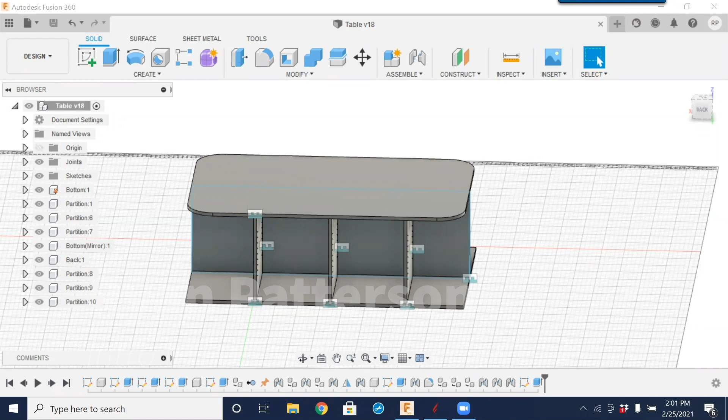Good. Today we have, I think, all the hard work done. All the challenges of constraining everything and getting the model put together. It's all done. And last week we went through and looked at how to use Fusion to create the tool pathing. If you remember, and I'm going to assume that I saved, so we could go into this manufacturing tab, and of course I did not. So we don't have any of the manufacturing here, but this is where, from last week, we spent most of the time in the manufacturing window.

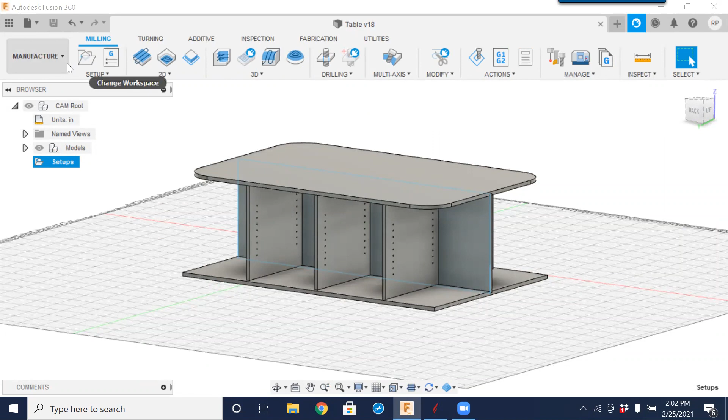Today, in our design space, in our workspace, we're going to be working with drawings and taking those drawings out to VCarve Pro. And we're also going to look at using a gadget within VCarve Pro to help with the import of the items. So we're going to kind of see how it goes. I've not used the DXF import gadget from Vectric for a while, so I might have some relearning to do myself.

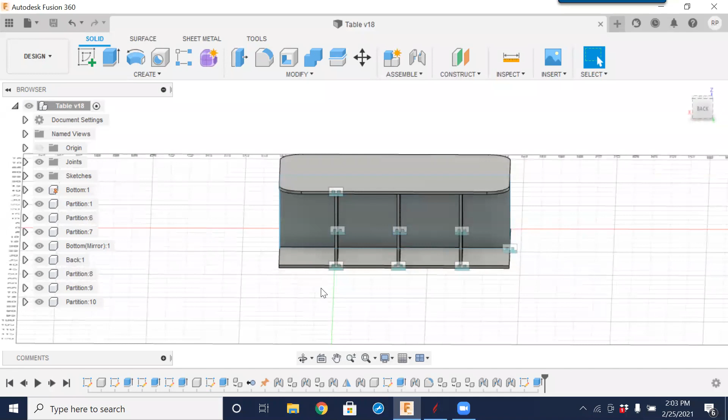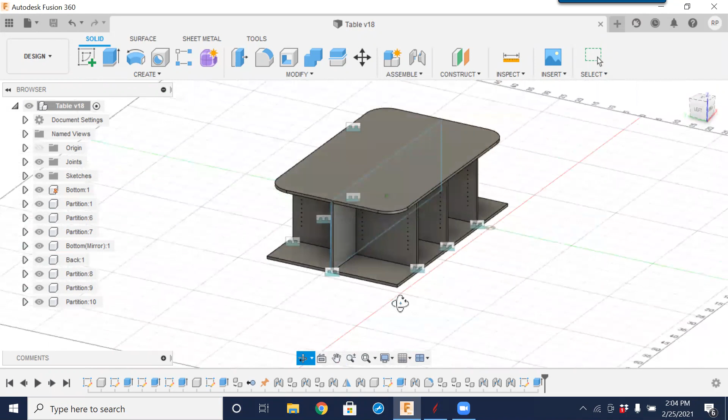And since the last time we spoke, I did add some holes for adjustable shelving. And all 6 partitions are duplicate partitions or cloned partitions. So if we change the size of one or change the hole location in one, they change across the board. Just to view what we've done and how this is all parametric and is done through the user parameters. So we've set up a couple variables, and I'm going to hope that they all just work. I've not actually fully tested this out.

So if you remember from day one, we came in and set up a couple user variables in here: material thickness, the width in the X, the length in the Y, and the height. Then we have a bin 1 and bin 2, which I don't know if I implemented those. So we're going to explore those to see if everything is actually implemented and working correctly.

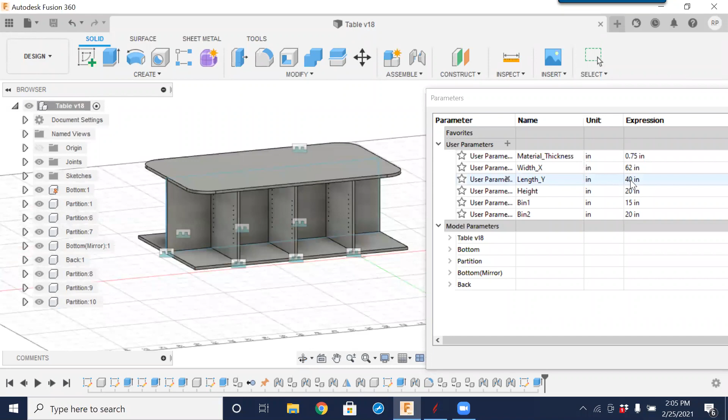So the idea behind this, now that we have this model completely finished, if we've cut this and we realize the customer, whoever it is, doesn't want it to be 40 inches deep, that they want it to be just 30 inches deep. So I'm going to enter in 30 and then OK. And we could see that that entire model has just been reduced in width, and all parts have been sized accordingly. So that is what parametric modeling is all about, and how it works out for us.

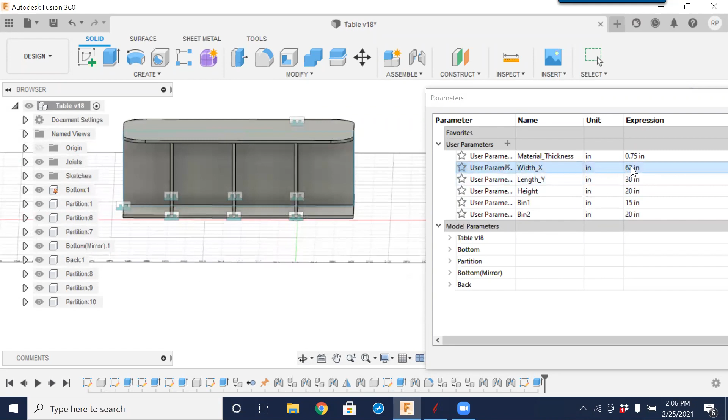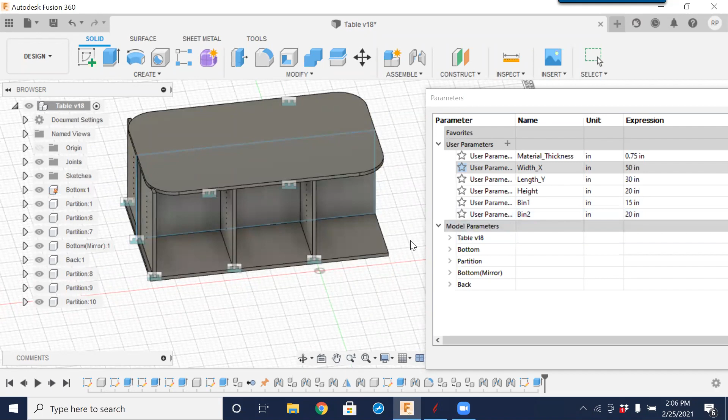The same goes for the width in the X. So if we didn't want it to be 62 inches, now this is where I might get into a little bit of trouble here with the partition. So we'll just step it down a little bit. So let's go with 50 in the X and see what happens. Yeah, so we can see we're running very, very tight on this partition here. And that is all because of the spacing that we've done, I can't remember exactly the spacing, but we'll correct that through adding this bin 1 and 2 to the equation and going in for a refresher.

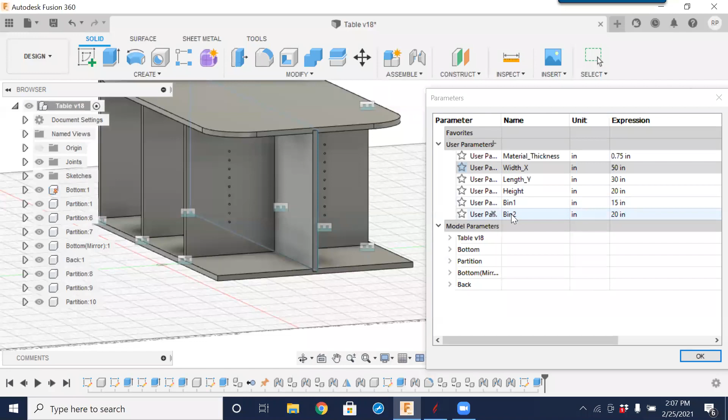So there's some questions coming in. A few things that we will work on is we will look at how I constrained and created the hole pattern. And it looks like I really messed that up with the sizing of it. So I kind of threw those in last minute. So there is something that is not constrained correctly there on those holes. And then we want to add in this bin 1 and bin 2. So let's first look at bin 1 and bin 2 and see where those variables could be used.

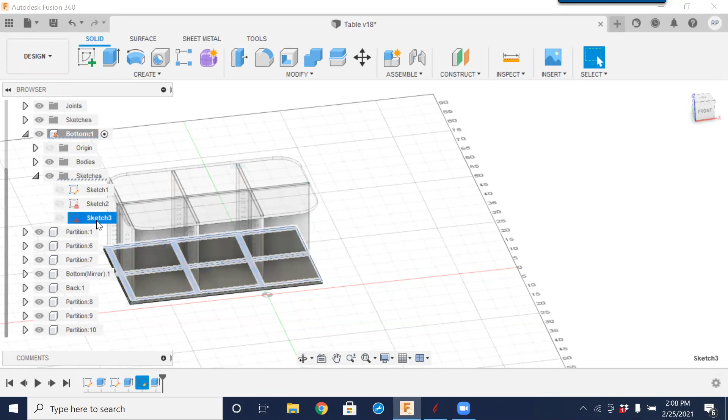So I'm going to go into and edit the bottom partition. And remember, we've made the bottom and top a mirrored image of one another. So if we modify one, we're modifying the other. So I'm going to set the option for bottom and check that, saying that that is what we are going to be working with. And the sketch that we have is this one here that has the partitions on it. So I'm going to right click and select Edit Sketch.

And this is where we could add in the user variables that I just was looking at. So let's see, bin 1, and let's make the two outside ones maybe bin 1.

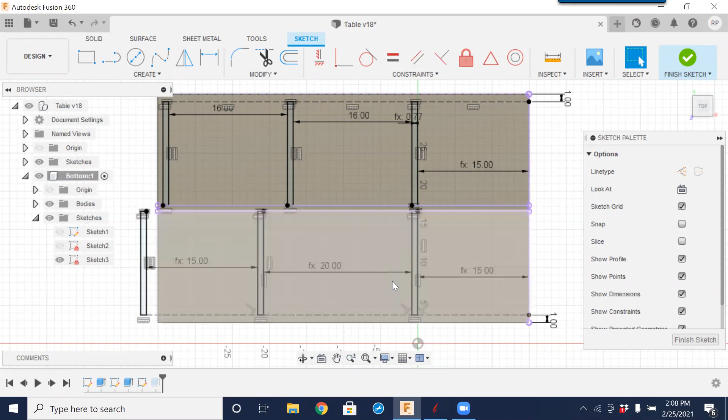Now we could get real fancy with everything here. See what happened right there? That just extended it out beyond. That's okay. We'll just have to go in and change the... So some of these already are of bin 1 and 2, and we know that by the FX in front of the dimension.

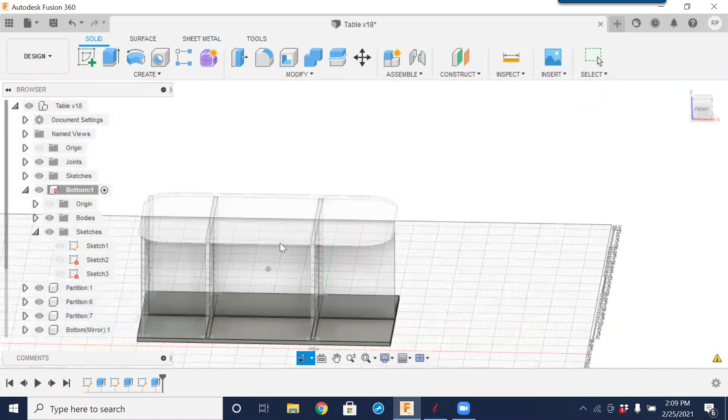So we've now just constrained and added the user variable for bin 1 and 2. So what that now allows us to do, if we do create a size that throws out the location of those bins or those partition spacing, we now have a user parameter that we're able to change the value.

Go back into user parameters, and I might have to start all over. Talking and trying to do all this at the same time is sometimes challenging. Good thing I'm not chewing gum. I might be in trouble.

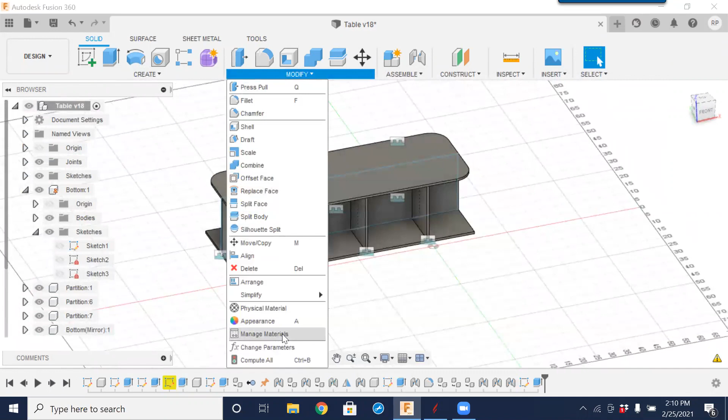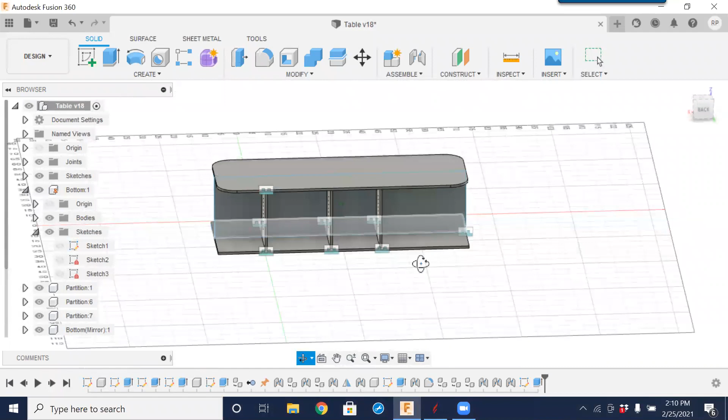All right, so we are scaled back out, and now let's see if changing any one of those other parameters for the bin is going to give us a different fit. And if it doesn't, we're going to pay closer attention to what that message is that's popping up. So we are in troubleshooting stages at this point.

So I'm going to go back in, change a parameter again. Let's bring it down to 10 and see if anything happens. So here we go. We're getting a warning here that sketch 3, something's failing. So let's figure out what that is all about. Something is failing in this sketch 3 on the bottom. So let's go back in to modify and edit that sketch to see what is going on.

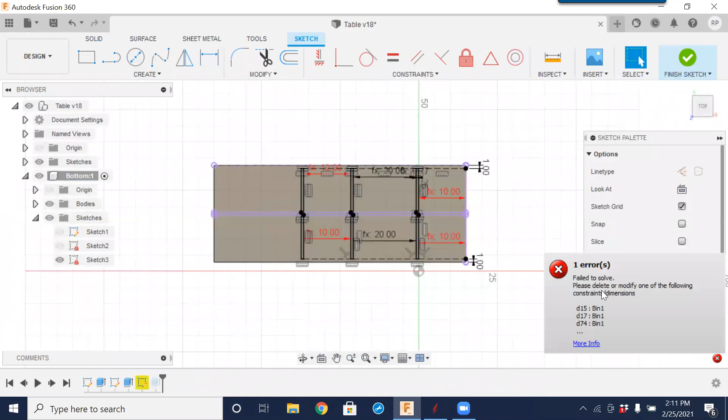So we are going to delete as it says to do. And it looks like I had a duplicate dimension on top of one another. So let's try that dimension again. That's looking like we are back on track. I think what has happened is when I made the width too small for it to fit, it really got confused on what I was trying to do with it.

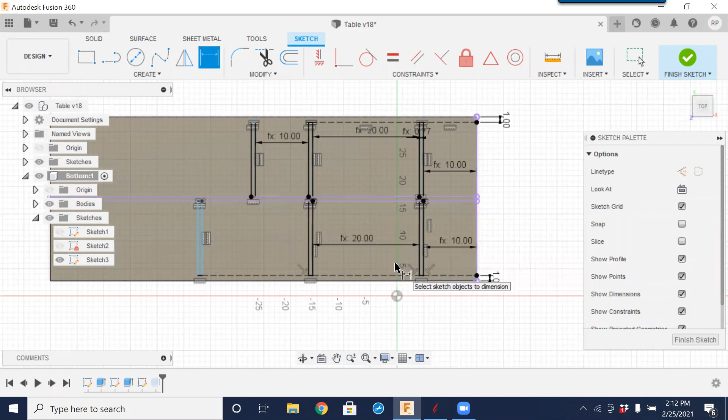I could put in construction lines here as well, and just use an equals constraint, or just do a multiple dimension that I'm doing here.

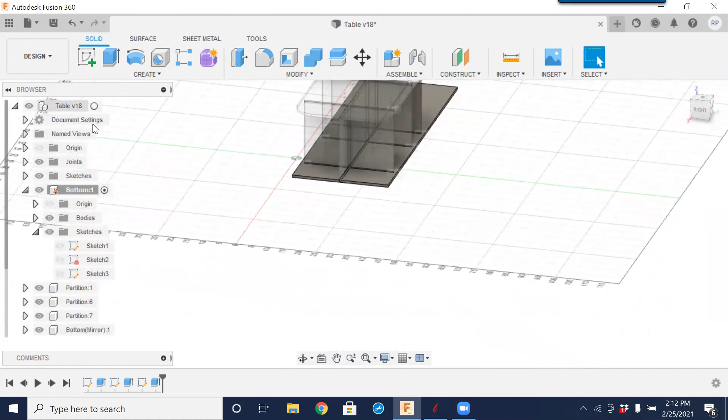All right, so now that we have that corrected, let's bring everything back into a manageable size again. So back into the user parameters, bring the X down to 60 and go up to 36 there. And I'm going to change some other parameters around.

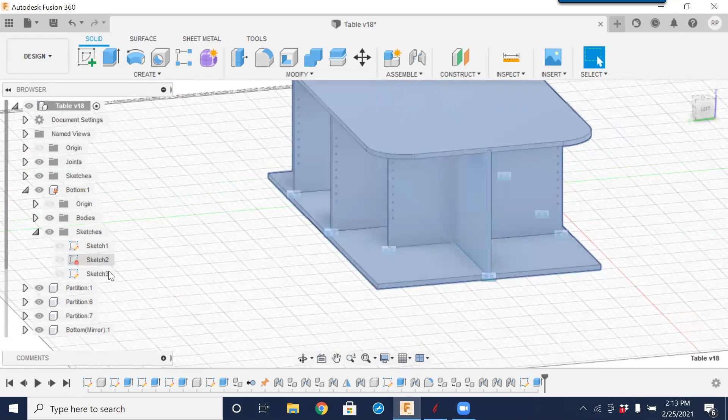Looks like I did not pay close enough attention to some other aspects of the constraining there. So we'll dig back into seeing what just happened right there. That is, again, on sketch number 3. In deleting a dimension line, I also had deleted a construction line.

So it is important to pay attention to any blue colored lines within a sketch. What a blue colored line is saying is that it is under constrained, that we do not have it fully constrained, so that could still be a movable part.

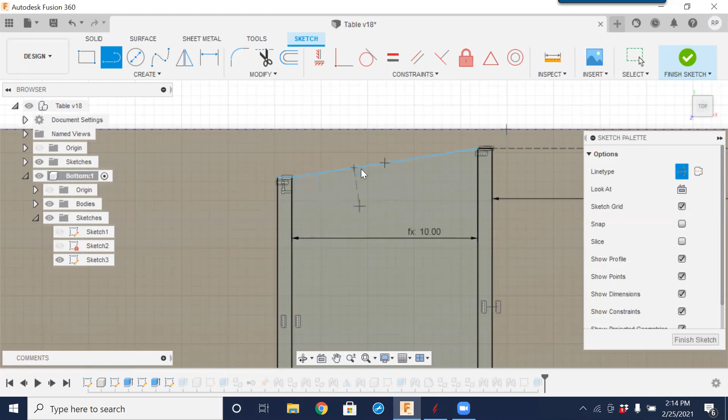To correct that, I'm going to run in another construction line there, and it is not a construction line, so I'm going to set this option here and click on the line. Select the line and tell it that I want that to be a construction line. Then use a horizontal constraint, and we are now back on track.

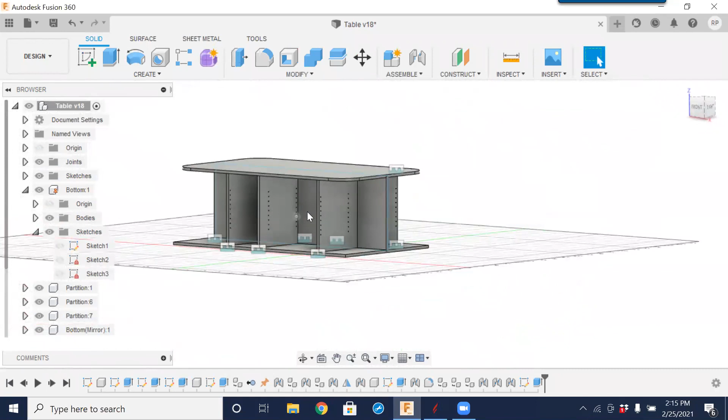With the spacing now being adjusted with the bin size, everything else looks like it's functioning. The one other thing that I see that we have to do, and I was challenged a little bit with it, is this hole pattern. So let's take a look to see what is going on there. So that is partition 1. Before I get too far, we'll go ahead and click save.

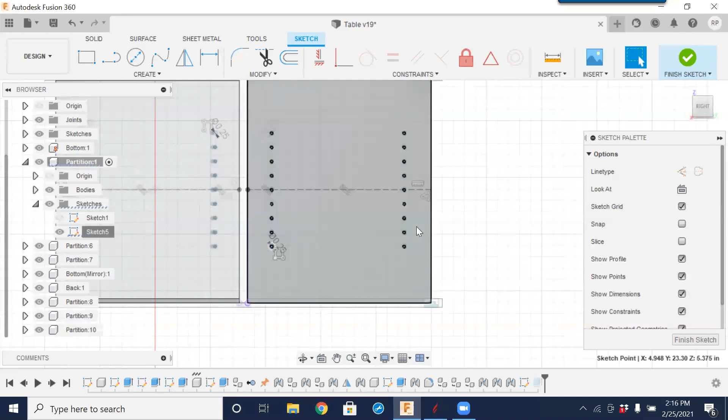The holes are on sketch number 5. So we'll right click and select edit sketch. And I set this up using a hole pattern rather than drawing each individual hole. So I started out, only drew this one hole right here, and then under create, I came down here and made a rectangular pattern. And that is what this little icon right here is saying.

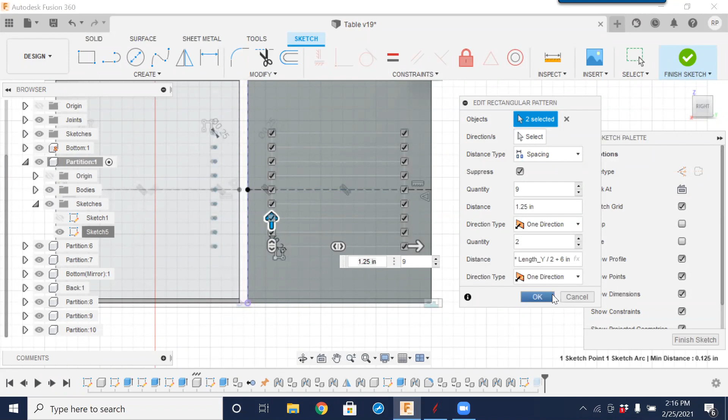So we can double click that, and it brings up the rectangular pattern of all the spacing of the holes, how many I have across the top and bottom. And I did set the location distance between this set of holes and this set of holes using our user parameters, and put a little formula and math in there to get that spacing. But what I did not do, as you are able to see, I'm still able to move those off to the side in both directions.

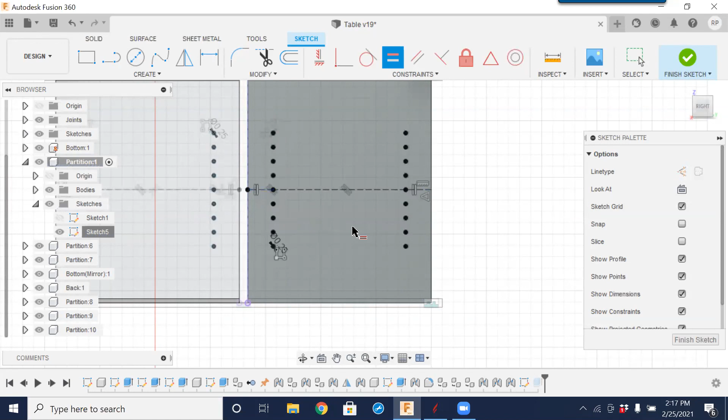So that is what we want to make sure that we are able to set. And let's see if an equals constraint is able to work there to there. And there it is. So now I do have a fully constrained part, and notice that all of these holes are now black, meaning that they are fully constrained and they cannot move.

So when we change the overall width of this object, all of those hole patterns should stay in line with one another. So we'll just test that and confirm that that is the case. Let's go back into modify user parameters and change that width down to 30. And they did. So they are now constrained and everything moves and flows the way it should.

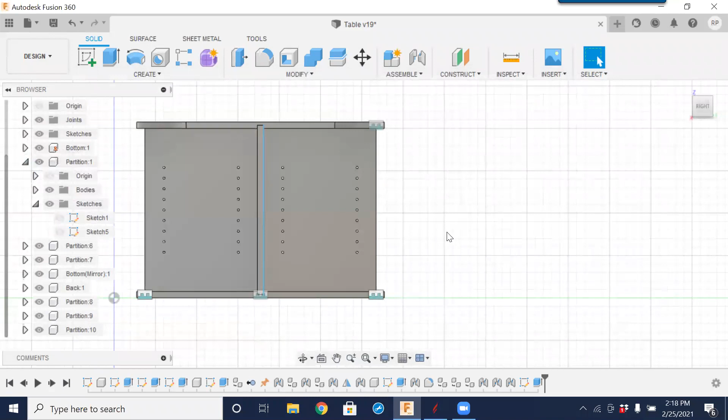Now, the one item that we do have to get rid of: the person I'm creating this for said that she liked the idea of the curved edges as a safety feature, but they are not going to work for what this table is being designed for. It is a craft table. And in laying out crafts, whether fabric, paper, cardstock or poster board, it is always nice to have a square edge to lay and align your work to. So these corners should not be rounded, they should be square.

And how we're going to delete that is look across the bottom of your screen. You will have the timeline. Everything that you have ever done from the very beginning is placed in this timeline. So here is the fillets that we produced, and clicking on those, you see that they are highlighted. So we're just going to right click and delete that. We don't want them anymore. So now we are ready to go.

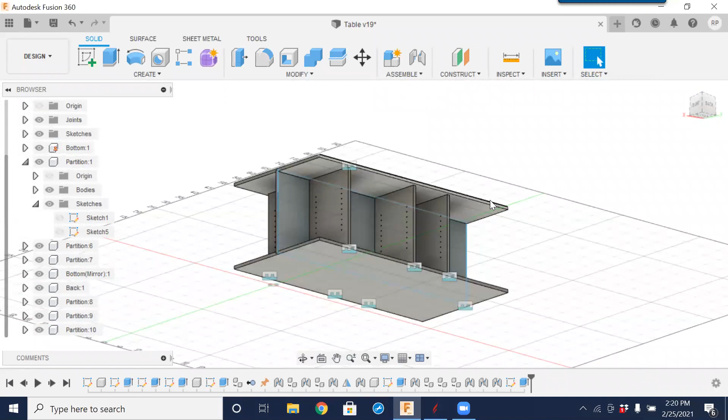There are a few things that I'll spend some time on later, and we will produce a video of these parts all actually being cut out to show the whole finished product. We are going to have some casters put on here to move around, and probably some kind of toe kick trim around the bottom. But as the title has suggested, we're 20 minutes into it and we haven't even started on VCarve Pro yet. So that's where we're going to look right now.

To go from Fusion to VCarve Pro, we need to have DXF drawings. What we have been working with up until now have been models. Even in the manufacturing side of Fusion, we've been working with the model only. We have not done anything with drawings. So that is another workspace that we are going to focus on. We have the design, and drawings is down here at the bottom, where we're able to create a drawing from this design.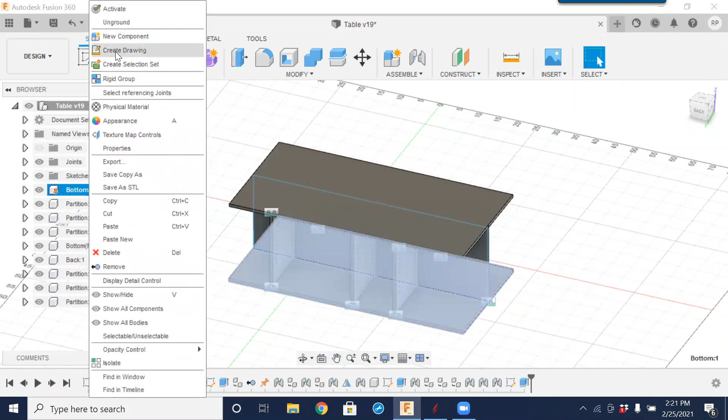And we have to do it one part at a time. If we created the drawing at this point, it is going to create a drawing of the whole assembly. We don't want that. We want an individual drawing of each individual piece, so we're able to bring those into VCarve Pro. So I'm going to start with the bottom. We could right click and choose to create a drawing of this design.

I'm going to come back to this. I'm wondering if we wouldn't be able to do multiples at a time, but we're going to take it simple and step by step. The sheet size, I'm not worried about this at all, because we're not going to use this title block. There could be a way to just create new, but it really doesn't matter. I'm going to say OK to this. It generates our title block.

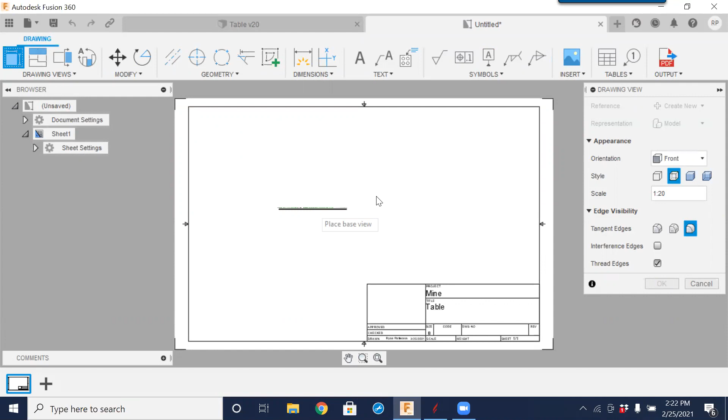And if you see where I have the mouse, that is the front view of our design. We don't want the front view, we want the top view. So in the orientation, I'm going to orient it to the top. And there is our bottom part. The other thing we have to pay attention to is the scale. Right now it is 1/20th. We want this to be 1:1, so when we bring this into VCarve Pro, we will not have to scale the part. So I'm going to change this scale to 1:1.

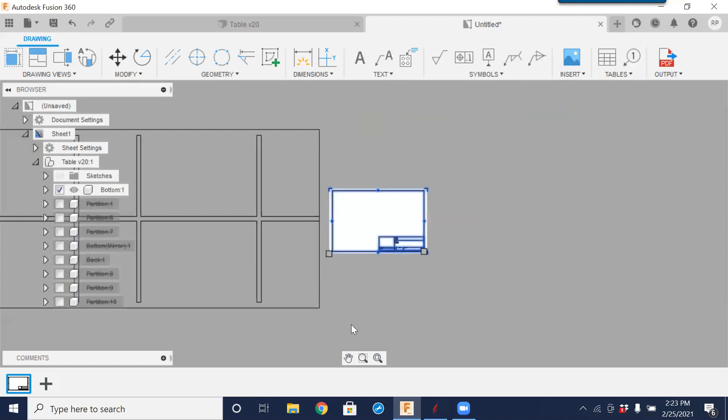And I'm not worried about where we place it. I'm just going to select it out here and say OK. I'm going to do a sweep select of all of that title block drawing. And now we have the basic two-dimensional drawing of our 3D model. We want to output this to a DXF file so we could import it into VCarve Pro. So under output, I'm going to select output sheet as DXF. Just going to overwrite one that's already there. As you can see, I've kind of pre-baked it a little bit.

We now have a DXF drawing that we're able to bring into VCarve Pro. And I do apologize, I'm going to be using Aspire, but all the same functions work in VCarve Pro just the same way. So I'm going to create a new file, enter in job size, just as you would any other VCarve file. I'm going to say OK. And now we could do an import of that DXF, and it is brought in.

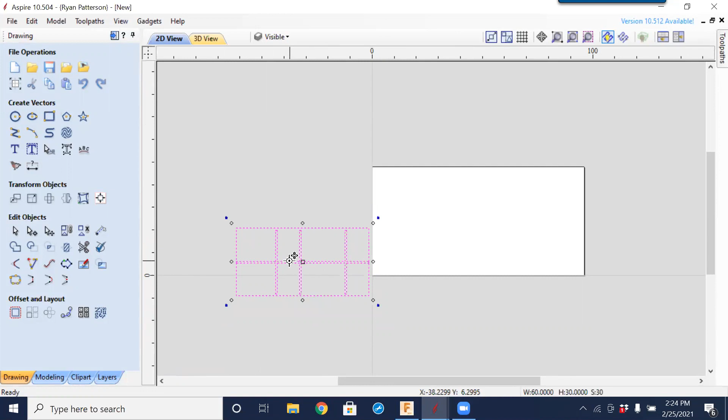We will later take a look at a batch import, but I don't want to do that just yet because we want to modify and correct some of the issues that you will have when importing. First, notice that we do not have any closed vectors or any closed shapes. We need to have closed shapes to be able to cut this. So I'm going to do a sweep select of all the interior parts. And notice we even have a little spot off on the ends. So with that selected, typing the letter J for join and selecting to join that together. We now have that section joined.

We are going to run a profile or a pocketing toolpath on this dado here. Depending on the width and the cutter that we have to use is going to decide if it's going to be a profile or a pocket. And to do that, we are going to need to have this dado extended out to the right of our part just a little bit.

So we got a question, will this work in any version of VCarve? Yes, all versions of VCarve import DXF drawings just the same way. Ryan, this is Kurt. Are you saying it needs to be extended past the end so that the cutter produces a square edge? Exactly, yes. Thanks. Thank you for the clarification on that.

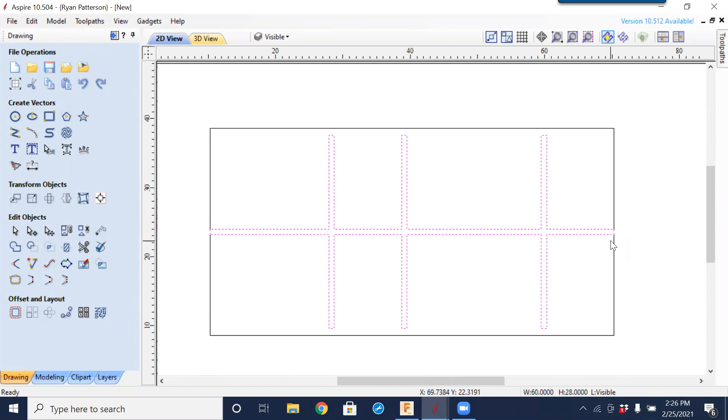And there's several ways of doing it. I don't necessarily care how far they extend out, as long as they extend out a little bit more than the radius of the cutter. So I'm just going to use node editing. Select the two nodes on the right. Just use the arrow to bump those over, and then also selecting the nodes on the left side. I'm using the arrows on the keyboard. In this case, I'm going to use the left arrow key that bumps those over to the left.

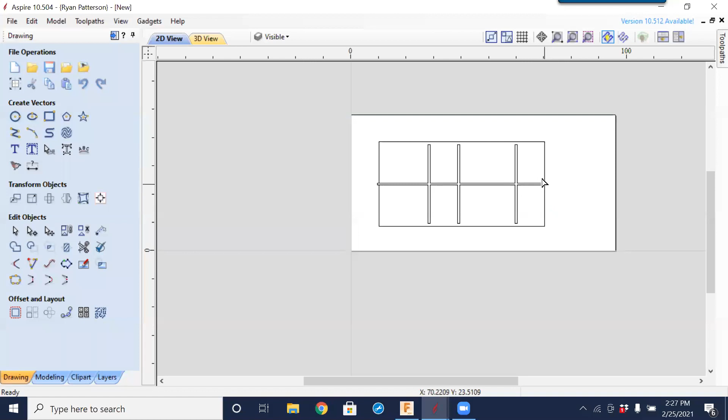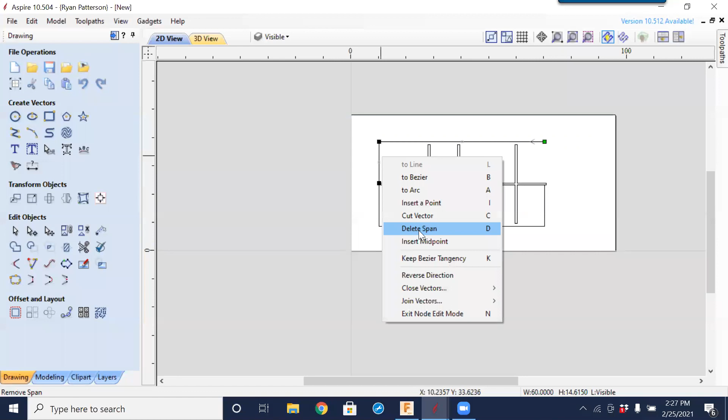The other thing we need to do is draw a connecting line to connect the rest of this together. And there's several ways of doing this. You could just use the line tool and draw those lines. That will end up putting in a couple extra nodes there. Not that it really matters, but I like to have things fairly clean. So I'm going to do a node edit of this top line section, hover over top of that line and hit the D on the keyboard. That is delete. I know it's a D because when you right click over top of that line, you see that it's saying delete span. That is the shortcut letter D. Selecting that removes that line span.

I've right clicked twice. That got us out of node editing to allow me to select the top line, the bottom line, and I'm going to use the option to join with a straight line. Notice that it connected this side. Do it one more time. We now have a complete closed shape that we are able to prepare for cutting.

So at this point for toolpathing, we really wouldn't toolpath it any different than we would any other project. There are some notes that you would need to take and translate over, and that is the depths. How deep do we want these, material thickness, and all of that doesn't transfer over in a two-dimensional drawing. So we're going to export a couple more items, and then we're going to look at a batch import. This is a gadget that has been around since the gadgets came around. I think it was one of the first gadgets that existed for bringing in multiple DXFs at one time, and then we'll take a look at how we could nest those items.

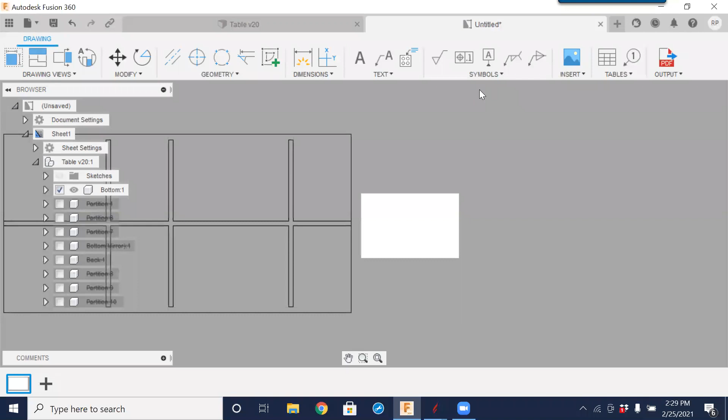So going back over into Fusion, what we have created here now is we have our table main design, and then we have a new untitled sheet. This untitled sheet is the drawing. I don't typically save the drawings if their only purpose is for going to VCarve Pro. I just end up recreating them when we need to cut the same part again. Or if something changes, I'll just recreate the drawing. So I don't typically save the drawings.

And the other part that we're going to need is the back. So I'm going to right click the back and create a drawing of that. And actually for the back, well, let's go ahead and do it. I probably wouldn't even go through the stages of creating a drawing for the back. I would probably just use the measuring tool and draw out a rectangle in VCarve Pro.

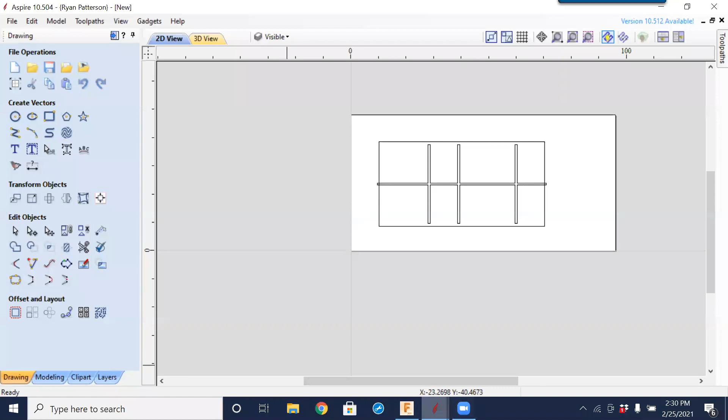The keystrokes that I used for joining those lines was the connect line: jump back over into Aspire here, join with a closed vector with a straight line option. Right click and select create drawing. Changing that scale once more to a 1:1 ratio.

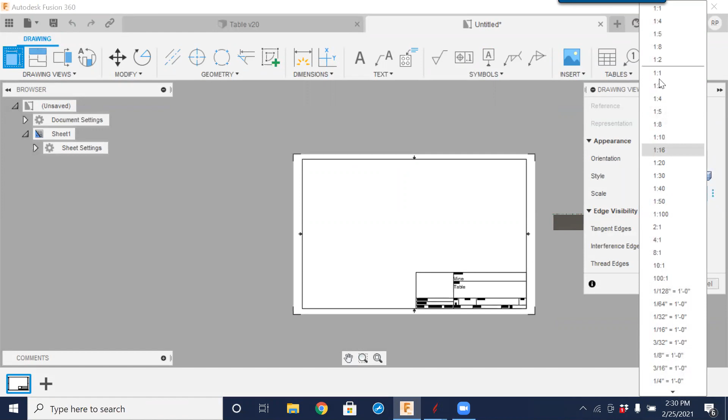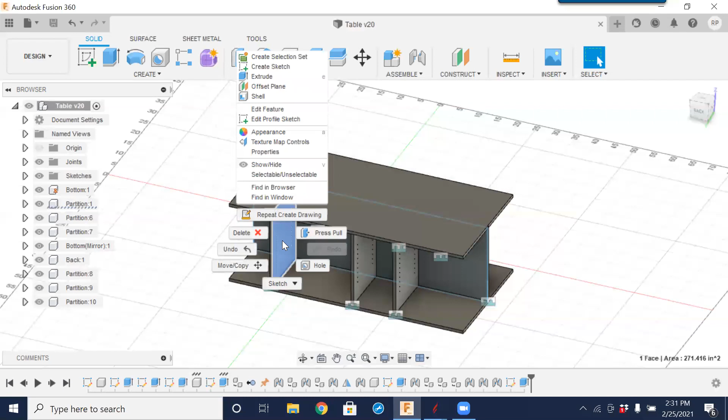All right, so that is the back. I'm going to go to output and create a DXF drawing. We will call this back. Again, close that drawing. I do not need to save it. And we want to create a drawing of the partition, or any one of these partitions. They're all the same. So right click on the partition and create a drawing.

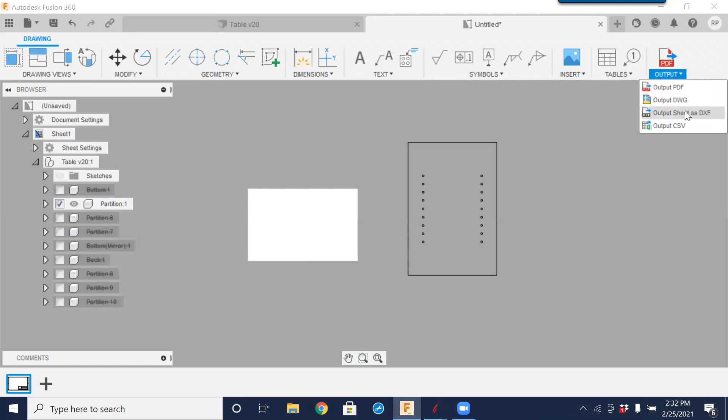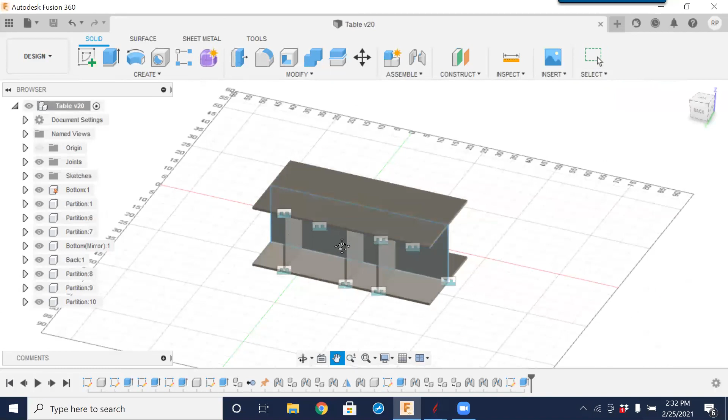And changing the view and the scale. Deleting the title block and doing an output to DXF for this as well. So those are the three main components that we need to be able to fabricate and build this craft table. And I'm just going to close this drawing here, just to view that, yeah, we got one.

Top and bottoms are going to be exactly the same, so we only need to output one of those. We have one back, and all the partitions are the same. So we only have 1, 2, 3 parts that make up the entire table. So Ryan, looking at the holes on the end partition, I would assume that you're going to have a separate toolpath for the holes, and you'll just decide which panels get holes on both sides.

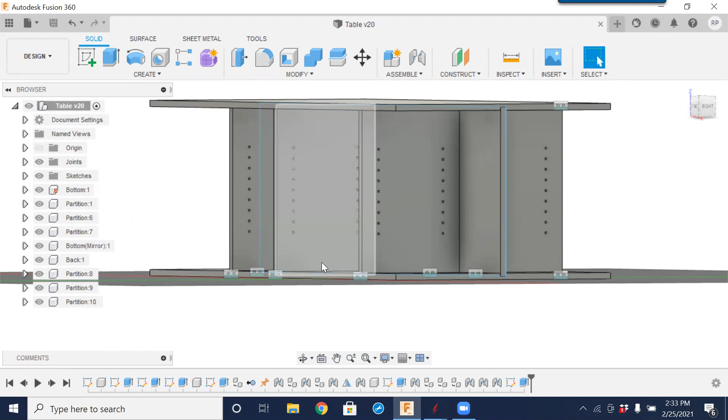Yes, that's exactly what will end up happening. Some of the panels I will drill all the way through, and some I will only drill part of the way through. So 2 of the panels will be drilled all the way through, and 4 of them will only be partially there. And they are constrained in a way that there is not a top, bottom, front, or back to the panel. So it doesn't matter which orientation, there isn't a mirrored version of it, which you sometimes have to be wary of and cautious about.

Did I miss the size of the holes? Is that a standard size for cabinet building? Well, I cheated a little bit. A standard size would be 5mm. But I made these ones 1/4 of an inch, which is also sort of a standard size. More common is 5mm, but 1/4 inch shelf pegs also exist. So I made them 1/4 inch mainly because 1/4 inch cutters are a little easier to come by than a 5mm. And so that's the reason why I chose to do the 1/4 inch.

Maybe off topic. Would this be a case where an air drill might be useful on the CNC if you were doing this in production? Absolutely. If you're a cabinet maker, really any cabinet making requires 2 bits: a 3/8 cutter for cutting all the perimeter cuts and any dado type cuts, and then a 5mm bit for any kind of shelf hole drilling. In some cases, you might need an 8mm bit if you're doing dowels and such, but you could always put 2 air drills on the same machine. So there are those options. All right. Thank you.

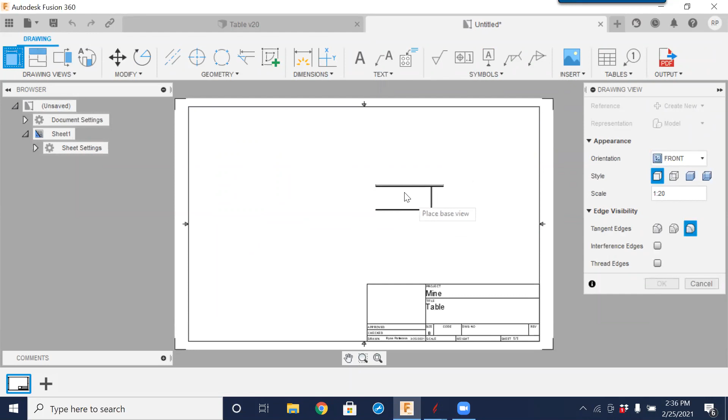All right. One more thing that I wanted to take a look at is the drawings, to see what happens when we click more than one item. So I saw this selection box here. I just wonder if I could select all 3 at one time. And not quite. They don't come in separately. It is giving us a drawing as if it were the assembly. So we wouldn't be able to do that all in one lump output. We still have to create each component individually.

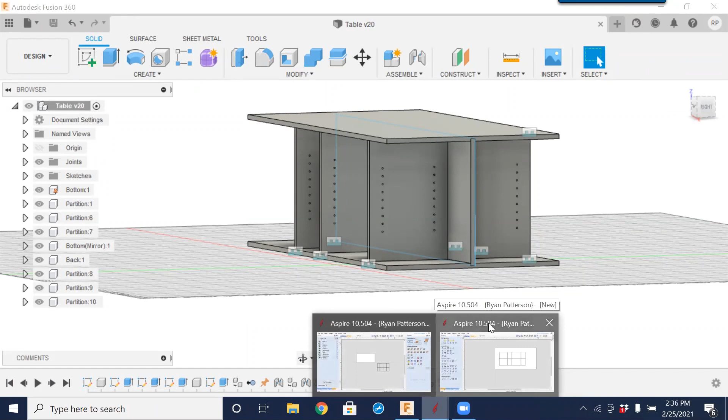All right, so we're going to come back into Aspire. Ryan, this is Kurt again. I'm assuming the drawing tool is way more robust and you could add dimensions and stuff on that, so you could actually print it out for a customer or something of that sort. Absolutely, that's exactly what the drawing function is really intended for: to create the engineering drawings for handing out to production, quality control, your customer, and all of that. That is what the drawings are really intended for, being able to print. And that is also why there's that scale factor there. Okay, thank you.

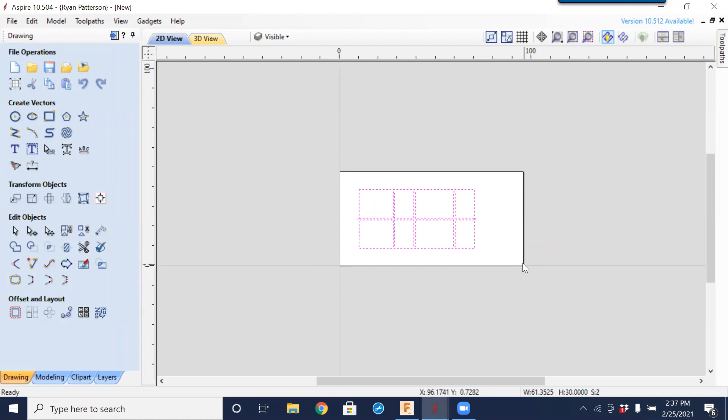All right, so again, I'm going to delete what we have here, and it's kind of starting from scratch. I was looking in our gadgets, and I saw the DXF Batch Processor. I kind of forgot all about this gadget. So we're going to see how it works, see if it allows us to select multiples of the same file.

So it is wanting us to choose a folder or a directory of where our DXF drawings are. And let's see, it is in Dropbox folder, trainings, craft table. So I can't open it, but it's just selecting that folder, selecting open.

So this is kind of the layout of how these parts are going to come in. They're going to be 3 in a row with a gap of 5 inches. And then there's our drawing space. And I'm going to say, okay. So it says 3 files have been processed. So there's 1, 2, and 3 drawings that have been brought in. So they're not nested. That is okay, because we don't want them to automatically nest because we need duplicates of all of these items.

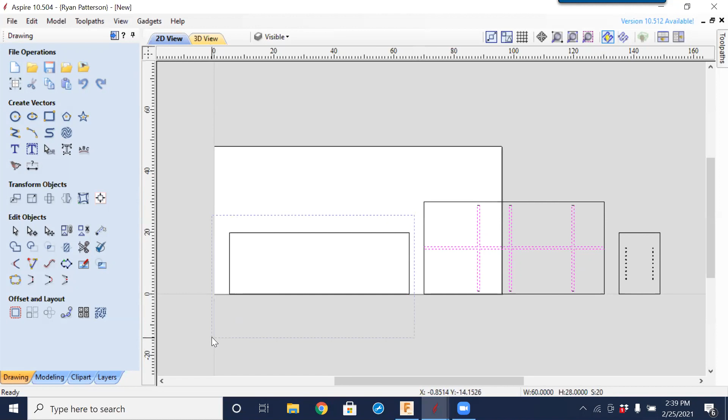Could you explain nesting? Yeah, we're going to go through that now. Nesting is a way to optimize material. And before we get into the nesting, I'm going to quickly join all of the items again, just as we did before. See, we're still separated again.

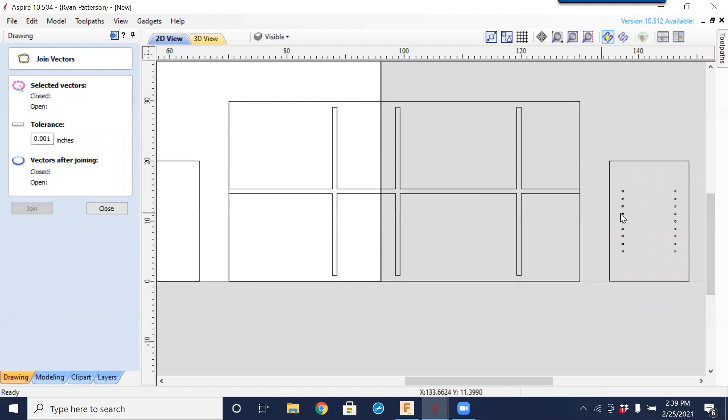And just doing node edit once more and deleting those lines, selecting both of those and going to join. And again, a node edit to bump that out just a little bit so we could see what's going to happen. So now we're going to nest these parts and optimize them for layout. I am going to rotate this side 90 degrees, because that's how I want it to be laid out for grain on that part.

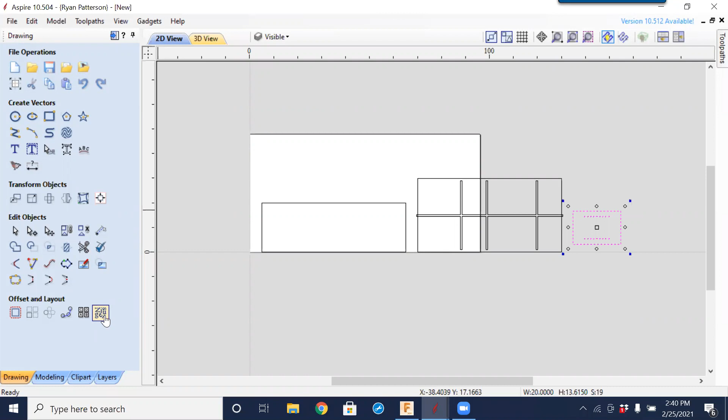So nesting is found on the left side. If you have an older version of VCarve or Aspire, it did not originally have nesting there. I can't remember what version it was included, but it's been in there for quite a while. So go ahead and click the Nest button and select all the items that we want to nest. Notice that it put a darker line around the outside of all of these parts. Even though these dados are separate drawings, it's looking at that as if it were one part.

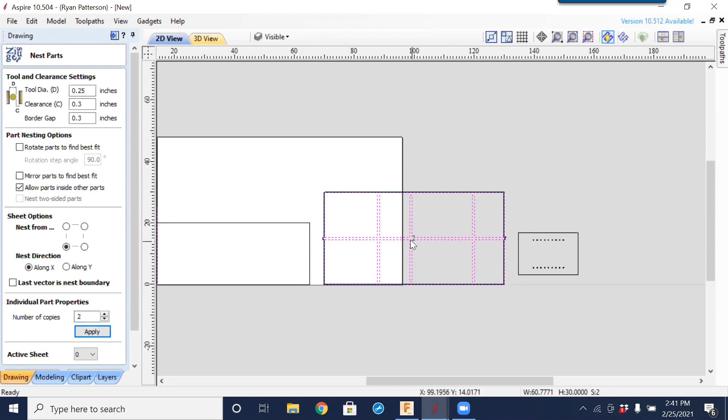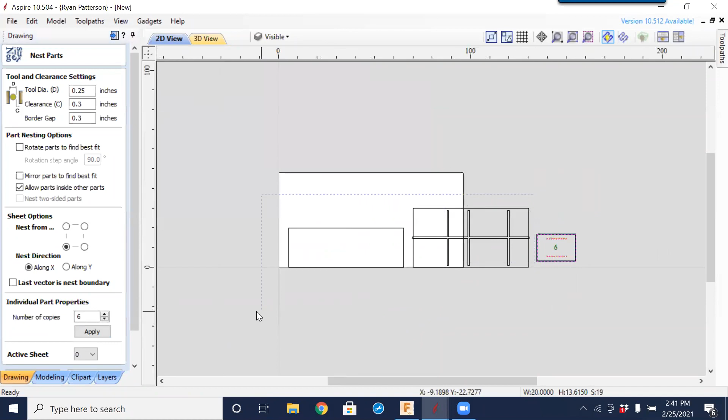So we also need to create a number of copies. For this bottom, I unselected everything by clicking off of the parts, selecting just this bottom and saying that I want to have 2 of those. Notice we have a number 2 placed right there in the center. I've applied that. Selecting the side and saying that I want to have 6 of those. And now it has the number 6. Now I'm ready to select all of them. We're going to have 6 sides, 2 tops and bottoms, and 1 back.

So we're going to start at the top on the left side for the tool nesting. The tool diameter that I plan on cutting this out with is a 3/8 cutter, so we need to allow for 3/8. The clearance, and you can see the little picture here, is how close the bit is going to come to the adjacent part while it's cutting. I'm going to put the clearance at 0.125, an eighth of an inch, which gives us a part spacing of 1/2 an inch.

The border gap is how close to the edge of our plywood we're going to allow these parts to get nested. I'm going to set that to an eighth of an inch, which means that when I lay this on the table, I have to be fairly accurate getting it laid straight, because it's only giving me an eighth of an inch of fudge factor there.

Then we have part nesting options. I do not want to have any parts automatically rotated. I want to have them laid out just as they are drawn. I do not want to allow a mirrored option, which in this case really wouldn't matter. And then allow parts to fit inside of other parts. Well, in this case, there isn't any of these parts that could fit inside.

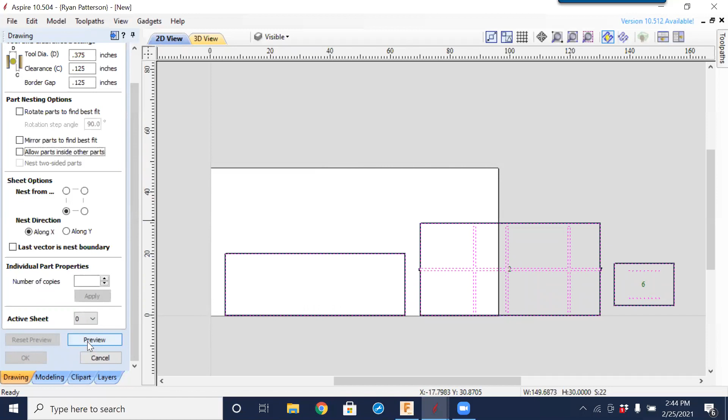Once everything is entered in, we can click the preview button and see it is now laid out on 1, 2, 3 sheets of material, and we can see how it is all there. If we like it, we could just say okay. If we don't like it and want to make changes, we would reset that preview and make whatever changes you would like. Once you've made those changes, select preview again, then select okay.

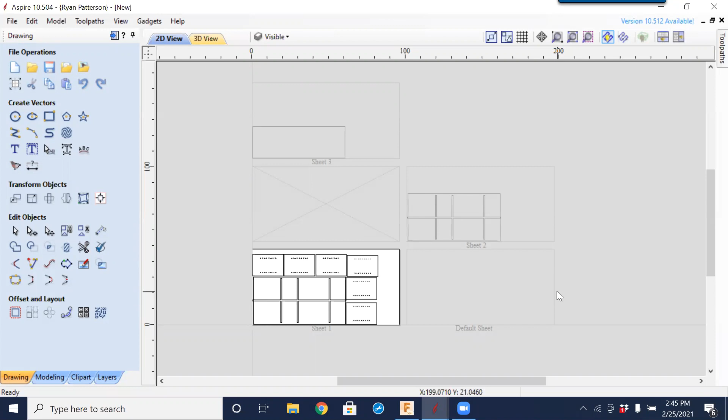I'm pondering the question that was just asked about whether you could make a drawing of the flat piece in the manufacturing. I could, that was my question. It was when you were trying to figure out if you could export more than one DXF at a time. I just wondered if it might be easier to copy and paste them from what we did last week, when they were manufactured. Yeah, I'm going to say yes, you can. Now, it may not be that

you create it from the manufacturing, but you can create a drawing of an assembly, right? So you can assemble all of these parts laid out flat, similar to how we did last week. And since all of those parts are oriented in the same fashion, you would be able to create a drawing of that assembly and have them all brought in as one DXF into VCarve or Aspire. So yes, that should work.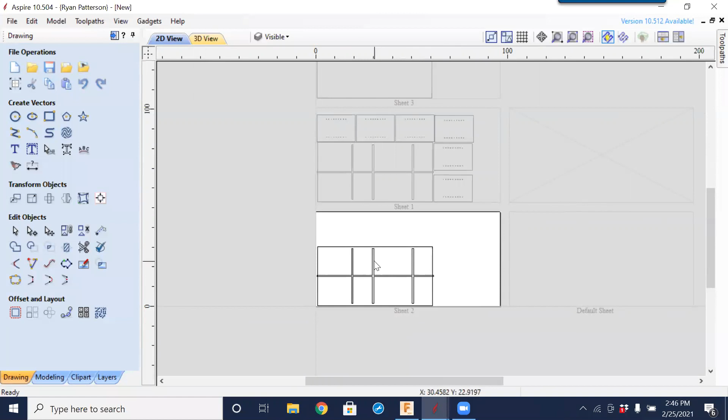So now we have sheet 1, 2, and 3. Sheets number 1 and 3 are kind of ghosted; we see them there, but we can't modify them. The active sheet is sheet number 2. To make another sheet active, you would double click on the sheet that you want to make modifications to, and add any other details to it.

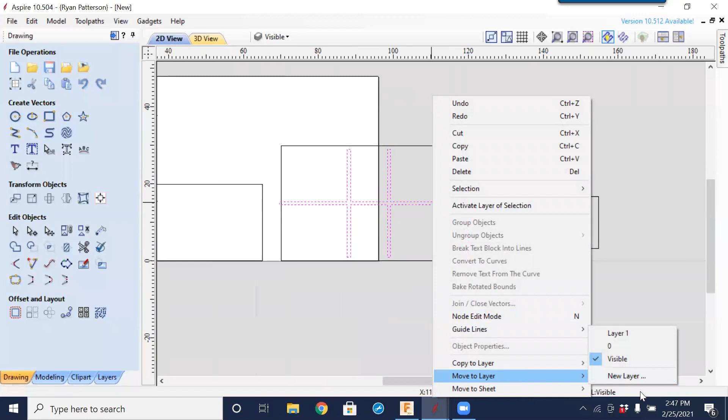So there's a few other things we have time for now that really make things a lot faster for toolpathing. Before we even start explaining it, I'm going to talk about layers some. So I'm going to undo, Control Z, and bring us back down to only the 3 items. And I am going to set these to a new layer. So I'm going to right click and move to new layer and give it a layer name.

Same thing for the holes. Move to, and then selecting the outside perimeters and moving that to a new layer, and we'll call that cut. We can now see in our layers list we have our new layers. We could turn those off. Nothing is visible. Let's clean this up a little bit. I'm just going to right click and delete the layers that we do not have any objects on.

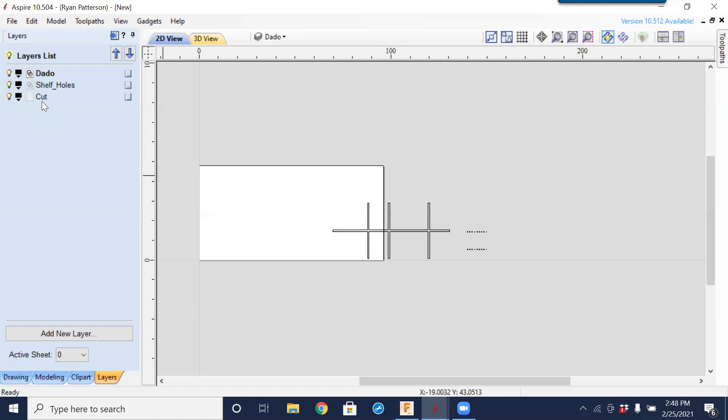I accidentally deleted objects on that cut layer, so thankfully we have undo. Whoever came up with Control Z in the computer world, that is awesome.

All right, so there we have 1, 2, 3 layers that represent the 3 different types of cutting that we're going to be doing. We have the dados, we have shelf holes, and we have the final perimeter cut. I just bumped that up in the list, so we're going to do shelf holes, dados, and cut. Not that that really matters a whole lot, but it does help us when we go to toolpath these items.

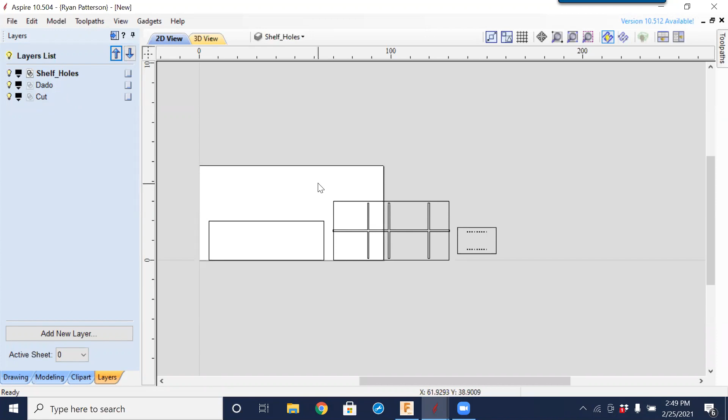So again, going to do a sweep select of everything, going to nest, and those values are still there, the 2 and 6. Preview, then say okay. So now we're going to see the magic of why I wanted to have those on their own layers, and that is done with the selection method of the toolpathing.

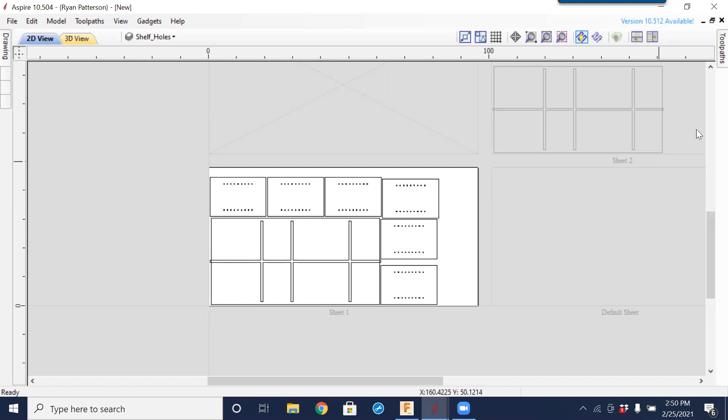Normally you would go around and select everything that you would want to toolpath. I'm not going to use the mouse to select any objects or any of the items. We're going to allow the layer to do that for us. So going into the toolpath, the first one we're going to do is a drilling toolpath.

And again, I am going to go against what we talked about earlier and just do the quick, cheap way out and just say I want to have all holes all the way through, just to make it easy. But I think everybody kind of gets the idea of how to toolpath. So here, I don't know the material thickness. I can't remember it. So I could say Z equals, and that's at 0.75. Let's go a little bit deeper of 0.76 to go all the way through.

I'm going to cut with a 1/4 inch end mill. I do not need to do any peck drilling. Coming down here to the selector button, which a lot of you may not have ever used. So this allows us to select objects based on the layer name. So I want to have all closed vectors on the shelf hole layer.

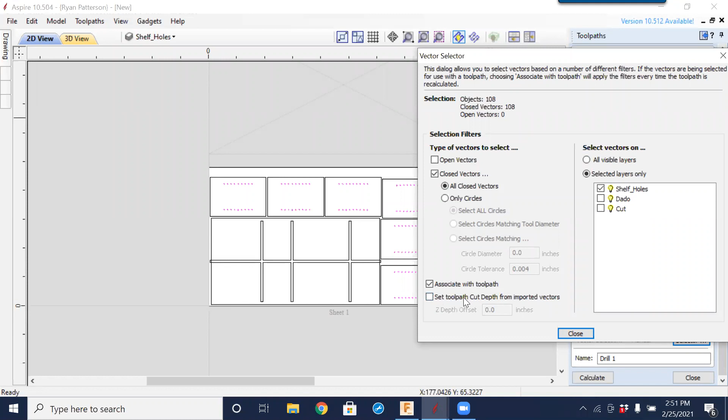I want to associate this with the toolpath. So it means that when I go to recalculate, any newly drawn objects on that layer will also be included in the recalculation. And if our DXF drawing did have depth associated with it, we would be able to pick up that depth from the DXF file, but this drawing does not have any depth to it. So we'll go ahead and say close here. Calculate. And we can see that toolpath.

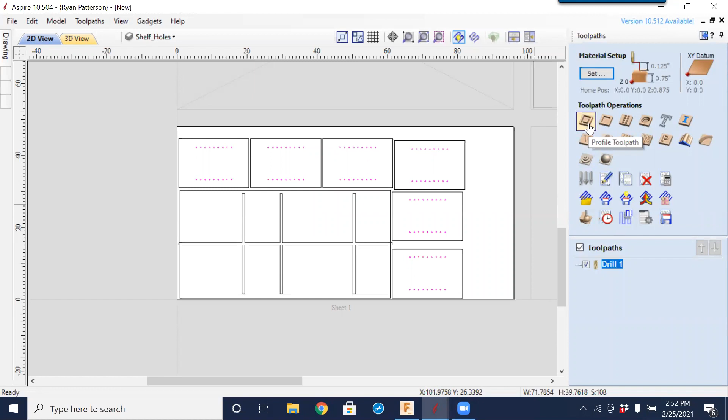Gonna go through the same thing for the dados, creating a profile, a total depth of 3/8. Gonna come in and select a 3/8 cutter. Gonna cut on the inside, coming straight to the bottom again, and using the selector to select all closed. I'm going to associate, uncheck the shelf, check the dados. We'll calculate that.

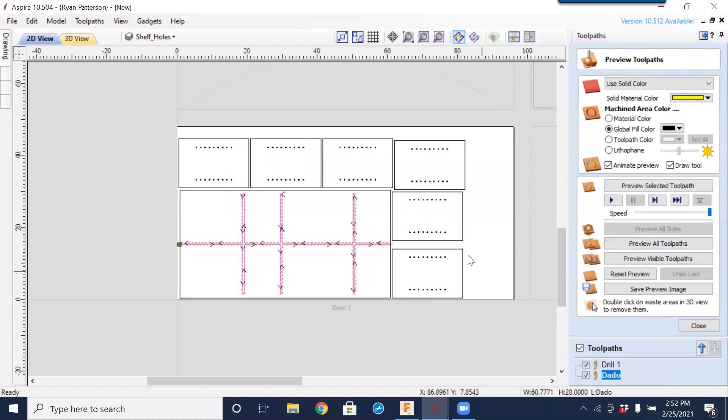And then the final one that we need to do is the perimeter cuts. I'm going to profile toolpath that, cutting to a total depth of 0.76. That same 3/8 cutter, cutting on the outside.

Hey, Ryan, can I jump in with a question? Absolutely. Do you ever use that separate last pass to make sure you get good, clean edges on your pieces? No, I very rarely use that, especially cutting plywood and wood. If cutting aluminum and metals, I might use it, but cutting wood, if you get the chip load and everything correct, and your spindle is square, and you're using the right RPMs and feed rates, you're going to get a smooth cut every time. Okay. Yep. Thanks.

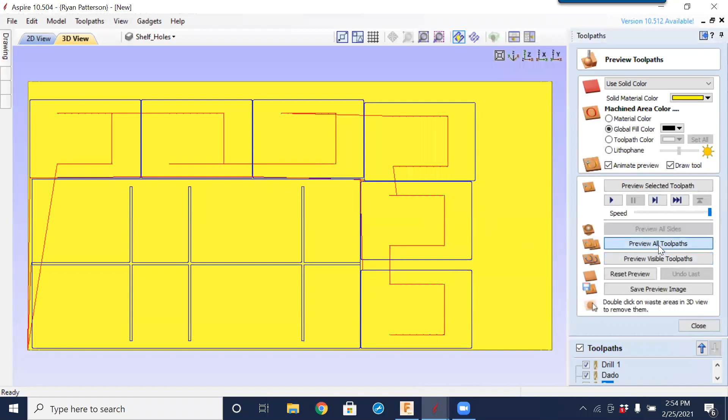Ryan, now this is Kirk. Could I ask a question about cutters? Yes. I think I answered my own question, but when we talk about chip load, the cutter has a defined speed and it's all been decided ahead of time. Do you understand what I'm saying? Yes. I mean, you just pick the cutter, but chip load is important for bit life and things of that sort. At least that's what I read. I'm not an expert. It is very important. Yes.

So chip load is a relation between the number of cutting edges on your bit, the feed rate, and RPM. With those three items, you will be able to create a chip load. I don't know why they call it chip load. It really should be called chip size, because what you're wanting to do is produce a certain chip size when cutting. The bigger the chip equals longer life on the cutter, and most of the time a smoother, cleaner edge.

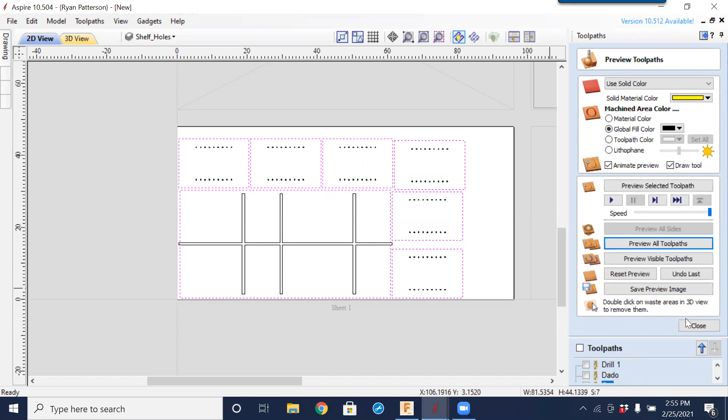So now that we have our three different toolpaths set here, notice that we don't have any of them set for the other sheets. There could be other ways to make this happen, but the way I know to do it is setting all of these to be visible or checked. And I want to create a toolpath template based on what we have.

So save selected toolpath as a template, or I want to save all visible toolpaths as a template. So I'm going to set that option, and you would give it a name. You might want to call it cabinets, because it is more specifically for cabinets. All right, so now, if you've not used this before, this is like magic too. This is all parametric. So I am going to delete all of the toolpaths that we just went through.

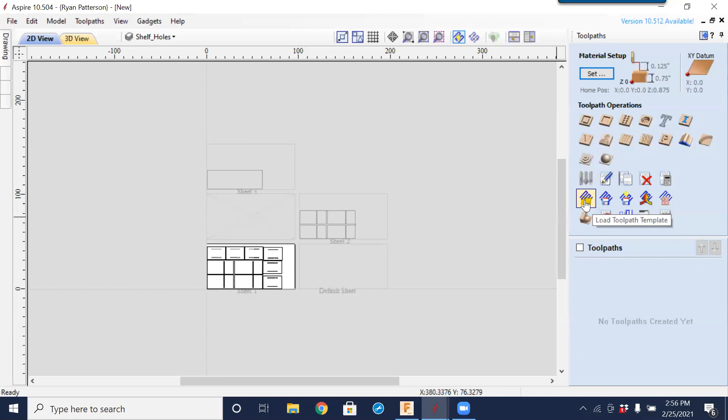And now we have 1, 2, 3 sheets. I'm going to load a new toolpath template, and just going to load the same one that we just saved and select open. Now it's asking me, do I want to apply this template to all the sheets? Yes, that's exactly what I want to have happen. And if you notice on the left side here now, we have sheet 1, sheet 2, and sheet 3. And 1, 2, and 3 now all have toolpaths that are applied to them.

So toolpath templates is a nice, easy, quick way to create toolpaths, especially if you do repetitive operations. And it really could reduce the number of mistakes that are made. So at this point, we are able to just save out each individual toolpath as we would want them. So I check sheet 1, save those out, sheet 2, and sheet 3, and so on.

Hopefully this has all been very useful. I know it has been a long 4-week session on Fusion, and there's probably still a lot more to learn and cover. And I hope you all enjoy Fusion and getting to use it some. But this is kind of the end of today. Any questions that anybody has on what we've covered over the last several weeks?